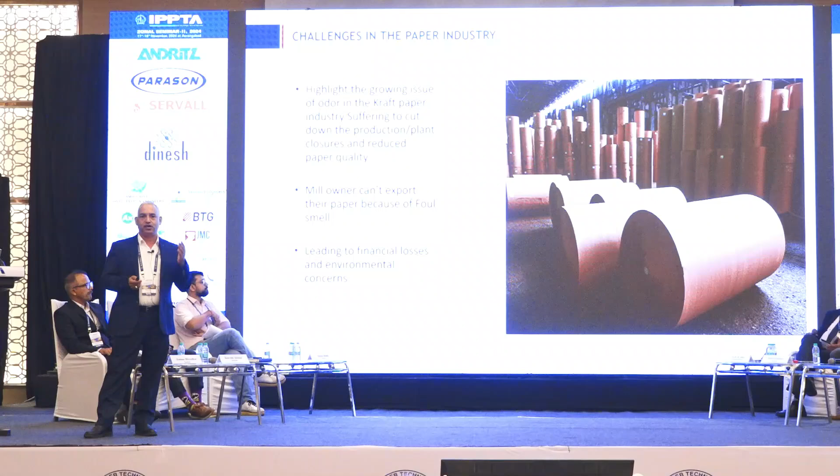As we all know, we are facing an acute problem of odor in all the Kraft industry. So many industries in Vapi have closed down, and many other industries have curtailed their production, not able to maintain the quality of our product and not able to compete in the international market. Odor is one of the issues. We are not able to maintain quality.

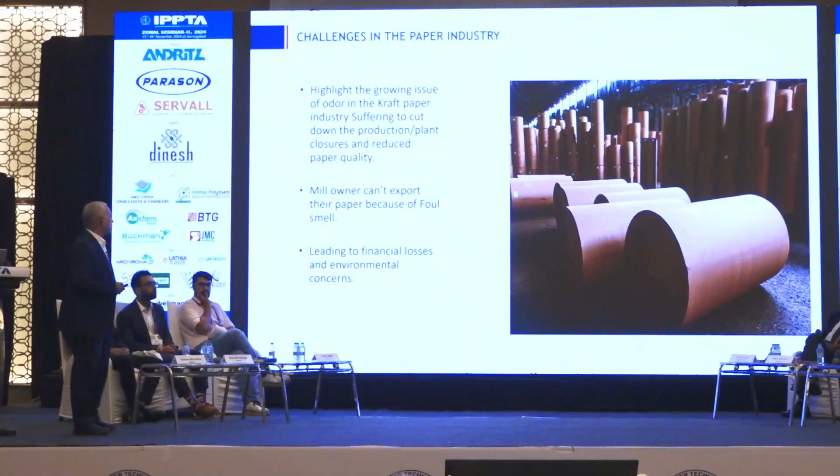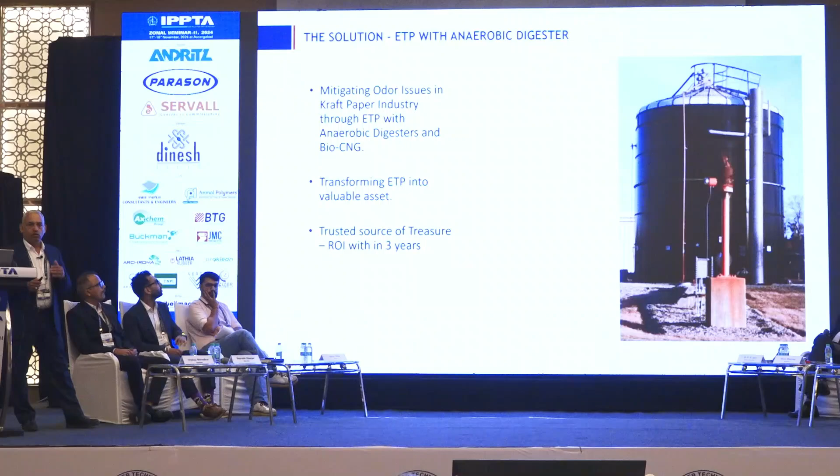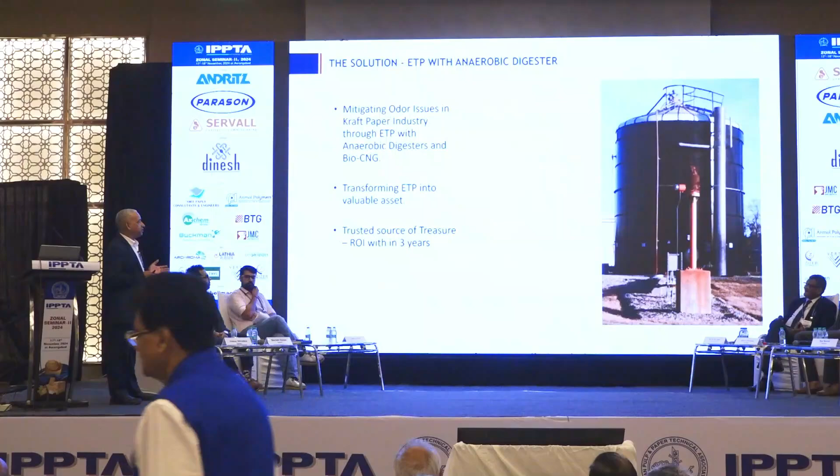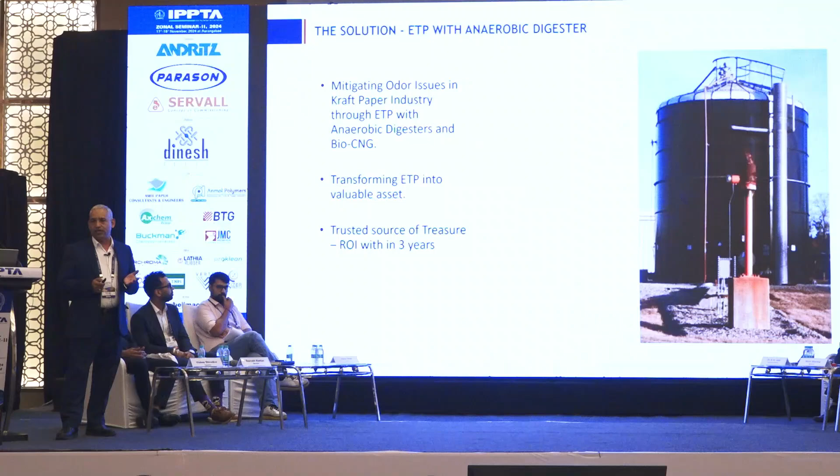We can use this anaerobic digestion system in our ETP to recycle the water with small purging to control the odor and COD in the total system. In the anaerobic digester, in the absence of oxygen, we transform the waste with the help of bacteria to bio-CNG. That is also a green energy which can be utilized in the power boiler, maybe power generation, and also CNG.

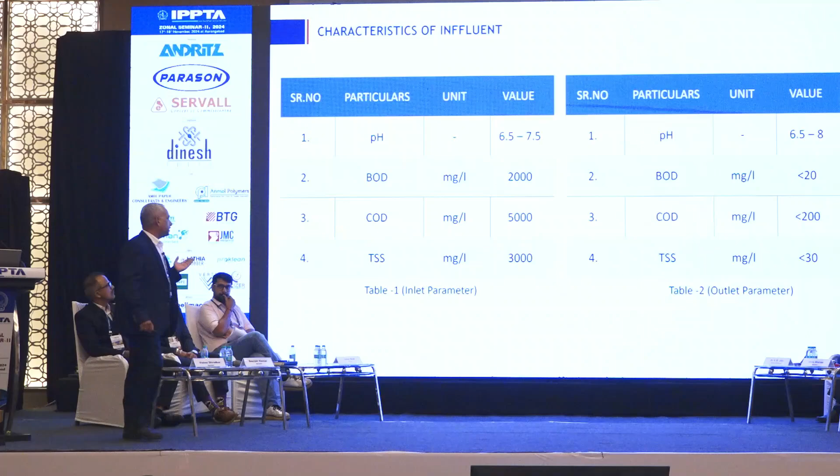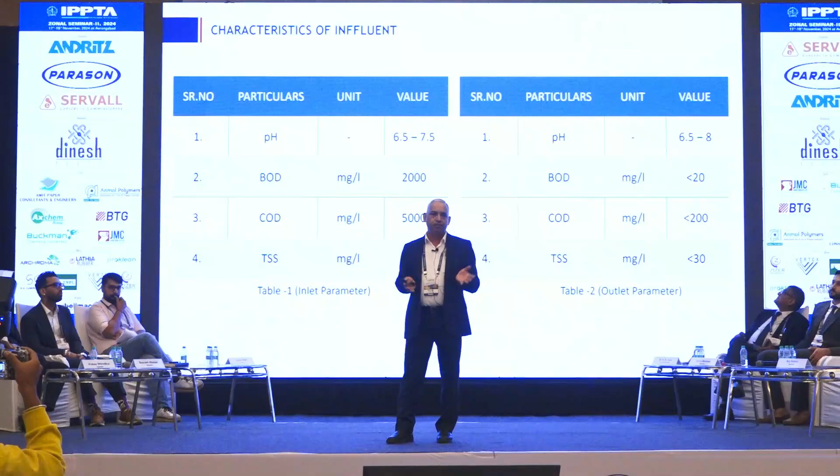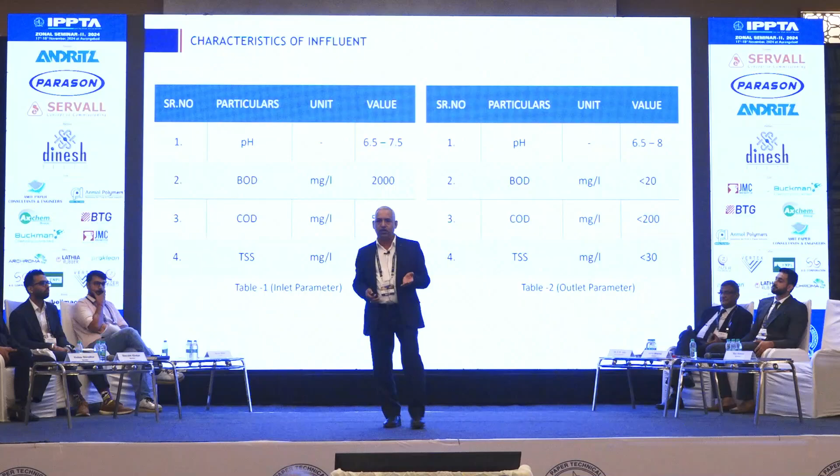These are the normal characteristics of the pH, BOD, COD, TSS in the input of the anaerobic digester. We have to maintain these parameters. Initially, when we start this system, the COD level may be 25,000, 30,000, maybe 50,000. But initially, for one time, we have to maintain it in the range of 5,000 to 7,000 ppm. Then it will be in the system, which will control the outlet parameter of COD as per the Central Pollution Control Board and State Pollution Control Board: BOD less than 20, COD less than 200, pH, and TSS less than 30.

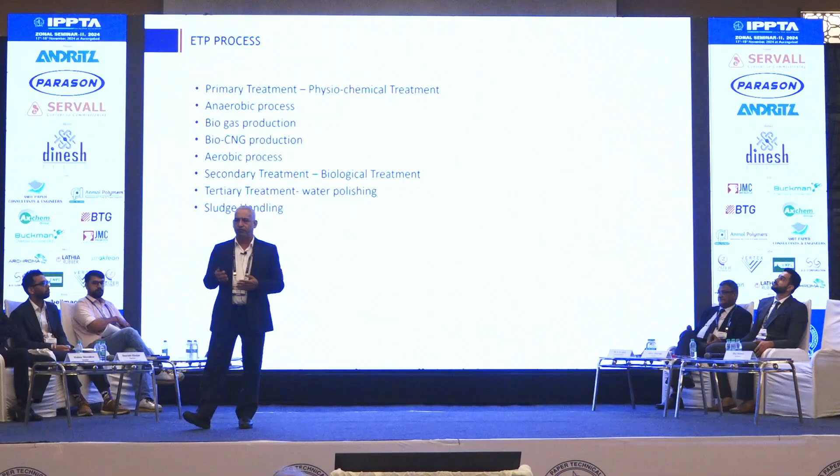In primary treatment, we maintain the TSS level only. In the primary clarifier, we remove the suspended particles like TSS, which is fiber and also non-fibrous material. Fiber we will reuse in the paper machine area, and inorganic material we will take out from the clarifier underflow and use as a fuel in the boiler.

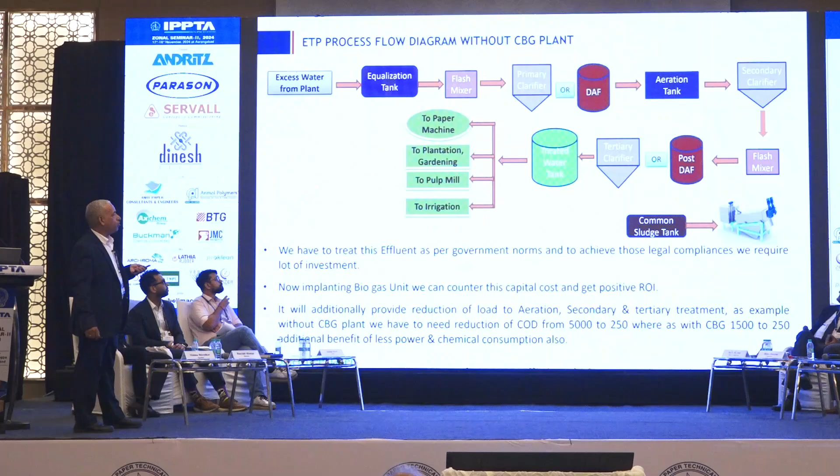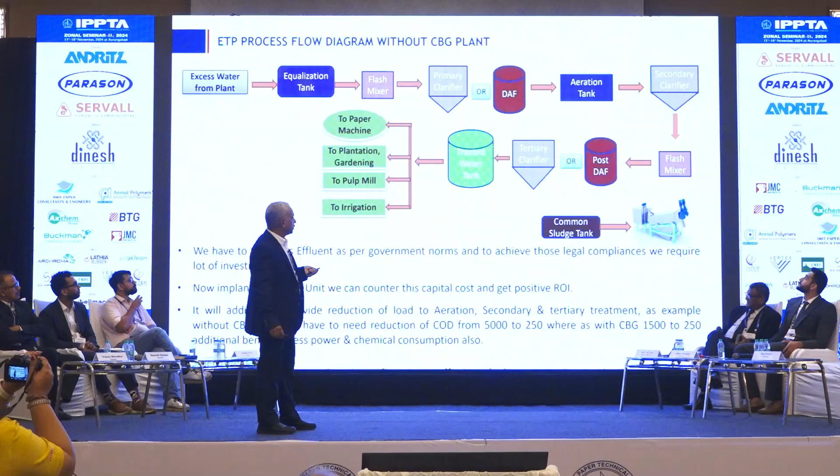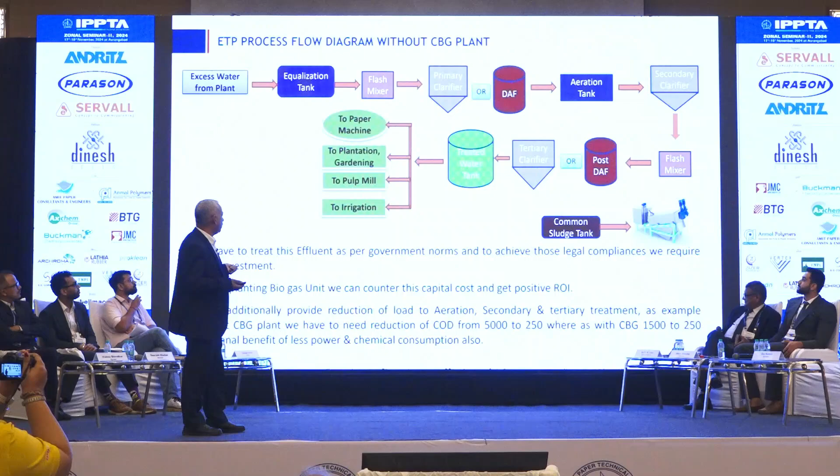This is the normal process flow diagram where we don't have an anaerobic digester. Either we have a primary clarifier or DAF in the ETP area where we remove the suspended solids. Then aeration to further treat it, reducing COD and BOD up to 90% with the help of oxygen. Then a secondary clarifier, then a tertiary clarifier to maintain the final treated water parameters as per the government norms. It may be used in the paper machine area, plantation, pulp mill and irrigation. With those parameters, we can utilize this in irrigation also.

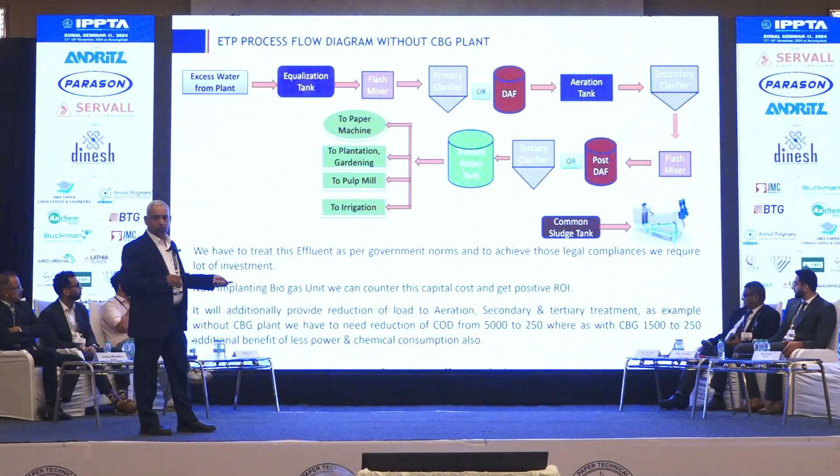If we don't have anaerobic digestion in the system, our treatment cost from 5,000 to maintain 250 is very high. But if we have an anaerobic system, 70% reduction will be there in the anaerobic digester. So my COD from 5,000 will come down to 1,500. So my aeration, secondary clarifier and tertiary treatment cost will come down 30% by this. And the area requirement will also be less.

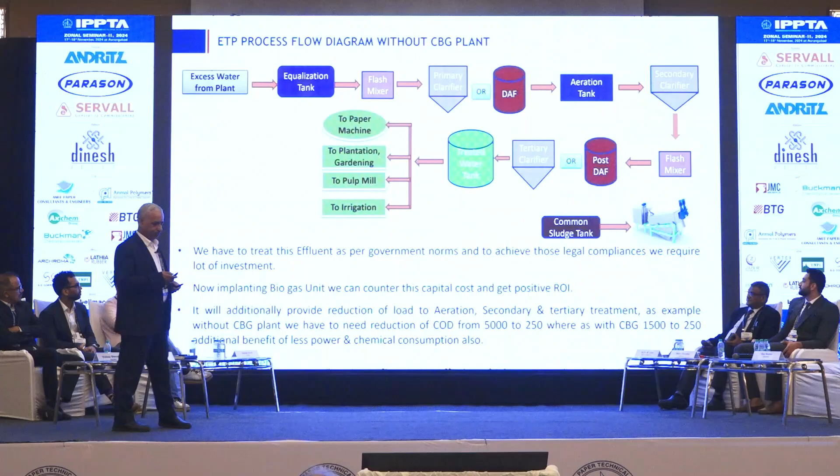Now, this was without the digester. This is with the digester and bio-CNG. After primary treatment, we remove the suspended solids. Water will go to the anaerobic digester. In the absence of oxygen, the bacteria will convert it into biogas, and that biogas contains methane up to 60 to 65%.

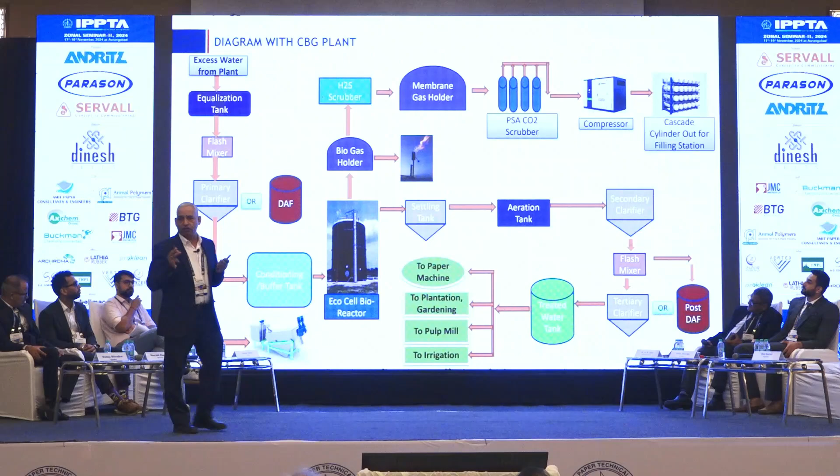But we have observed in 2 mills, one in South India and one in Haryana, we are getting methane up to 70-75% also, which is a very good value. And H2S content is around 2%, the rest is CO2. So first we have to remove the H2S in an H2S scrubber.

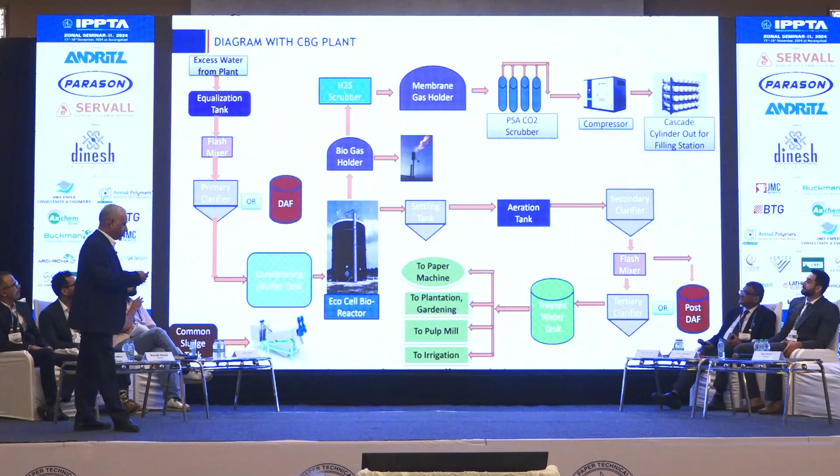There are some technologies in the market, you see here: H2S scrubber, wet scrubber, chemical scrubber, chelating agent. These are the technologies to remove the H2S, and the H2S will be converted into sulfur, which is also an organic fertilizer that can be used in the fields.

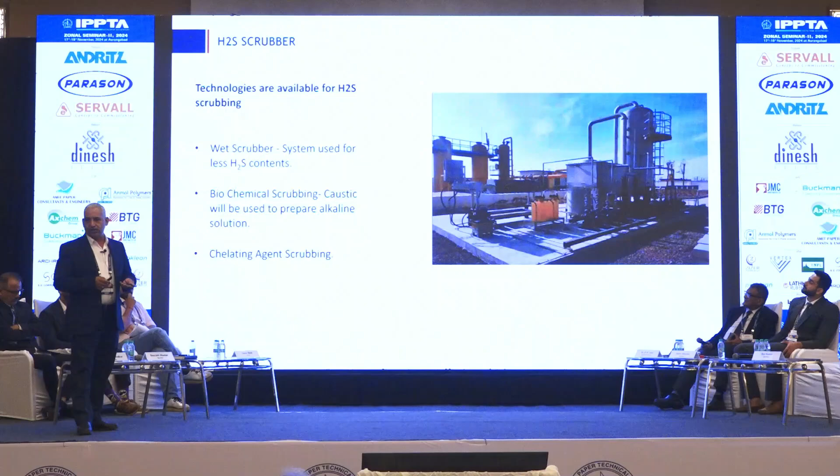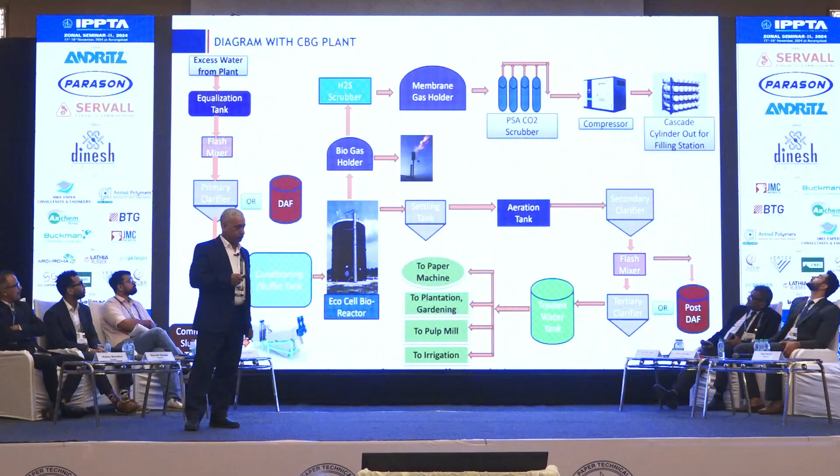Then there is a membrane balloon. After that, I will go through that. This is the input parameters of the reactor. This is the outlet. Methane percent more than 90%, CO2 less than 4, H2S is less than 10 ppm. And for bio-CNG, government has given up to 30 ppm, but we can maintain up to 10 ppm.

And use: either we can use it in the existing boiler as a fuel if we have shortage of steam, otherwise we can convert that into power also. Then power generation will be 2 to 2.2 units per meter cube raw biogas. If we further treat the raw biogas and remove the CO2, we can convert it to bio-CNG. That will be a fuel for vehicles, green energy.

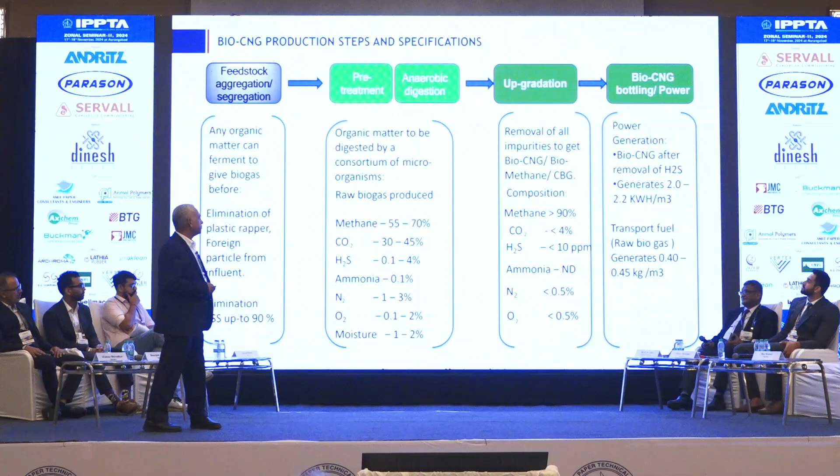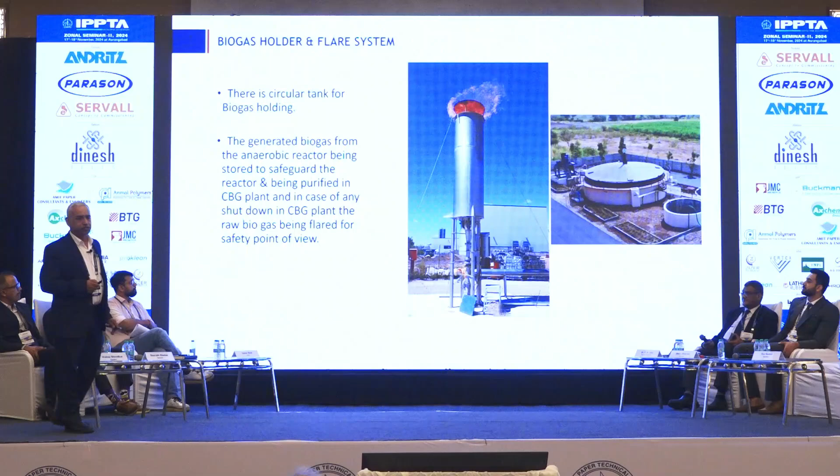This is an anaerobic digester. We have to have this system also, biogas holder in between and flaring system, because we cannot store the gas so long. So in case the system is shut due to some maintenance or other problem, we have to flare that gas for that time. And that will be auto ignition, a fully automatic system. H2S scrubber.

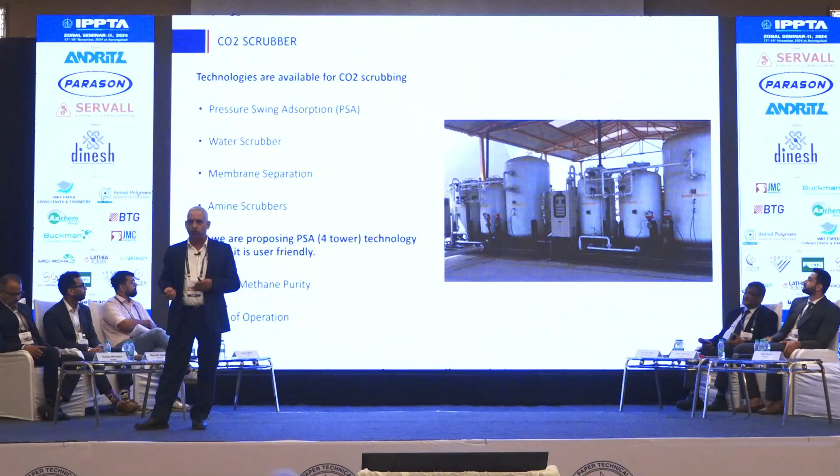Then next is we have to remove CO2. To remove the CO2, there are 4 technologies available in the market, but for Indian conditions, we prefer PSA, pressure swing adsorption technology, with the help of zeolite molecular sieves, which we also use in the oxygen plant to get oxygen from the air for either medical oxygen or any industry use. Same technology we use here to remove the CO2 from the methane gas, and pure methane will pass to the next process of compression.

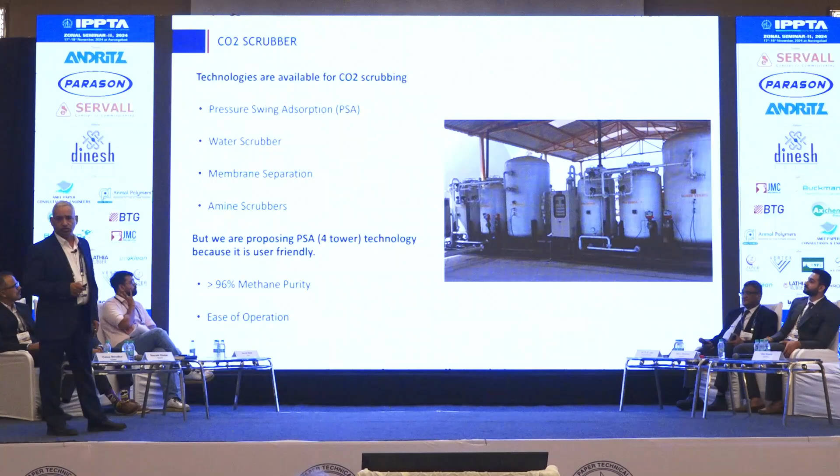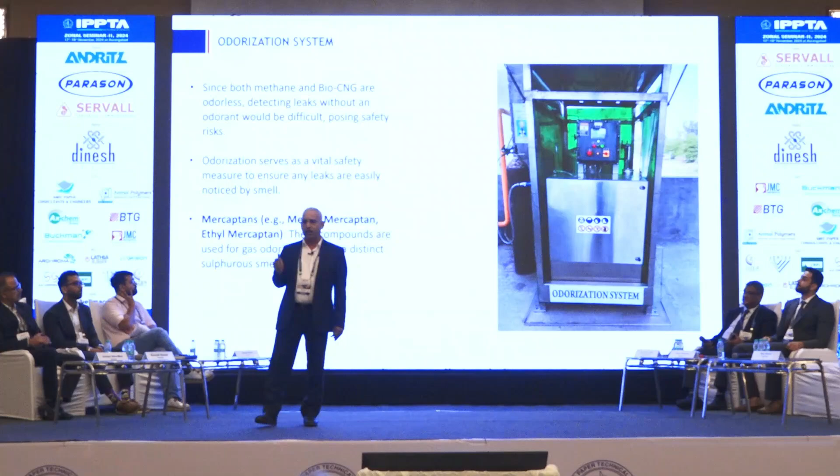This is the odorization system, just like LPG gas. There is no smell of methane gas, it is a natural gas. So we have to add some ppb level of mercaptans, so that in case there is any leakage, the operating crew comes to know that some leakage is there, to control that leakage.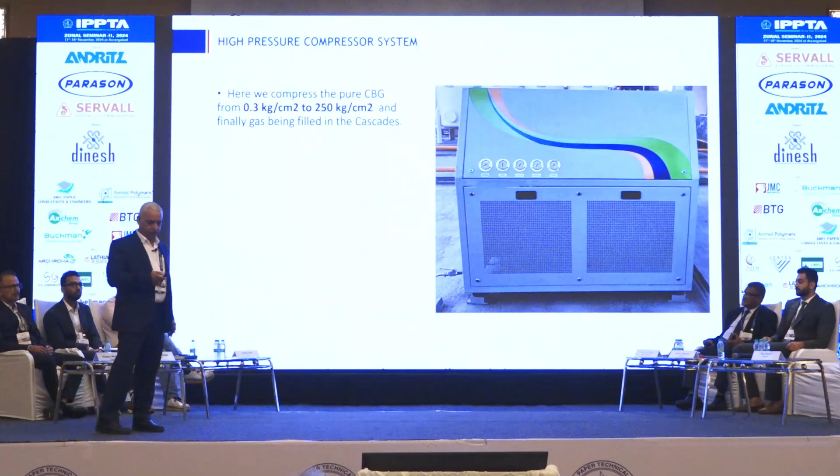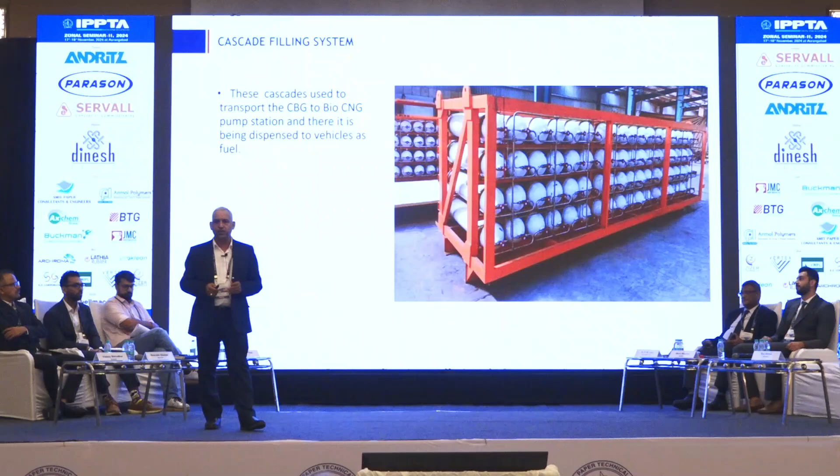Then finally the cascades. There are 2 forms of cascades, one is 40 cylinders and another 60 cylinders. In 40 cylinders we can contain up to 500 kg of pure methane gas, and in 60 cylinders we can contain up to 900 kg, for the transportation of the fuel to the petrol pump. Now see, this is the actual selling point of the bio-CNG at the pumps.

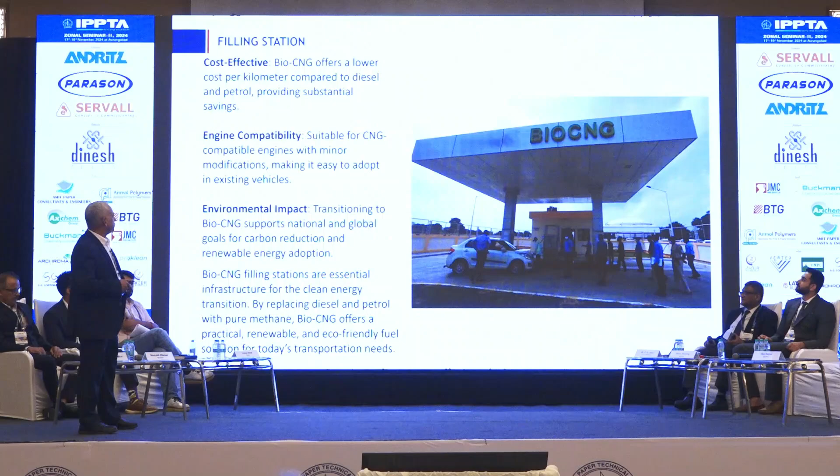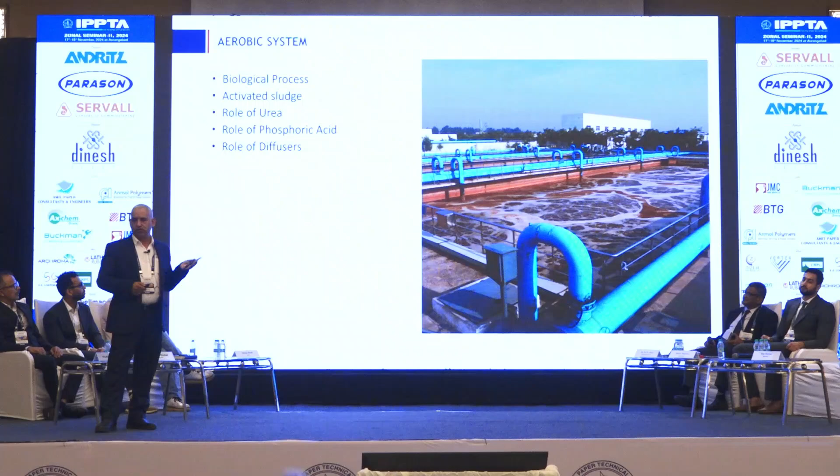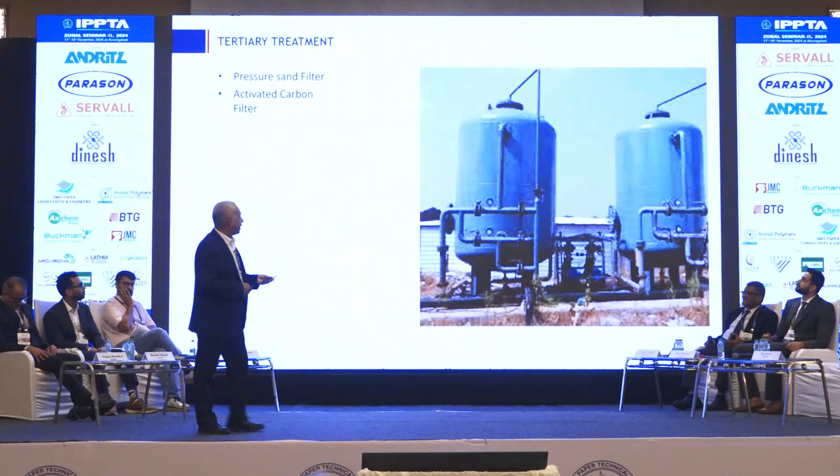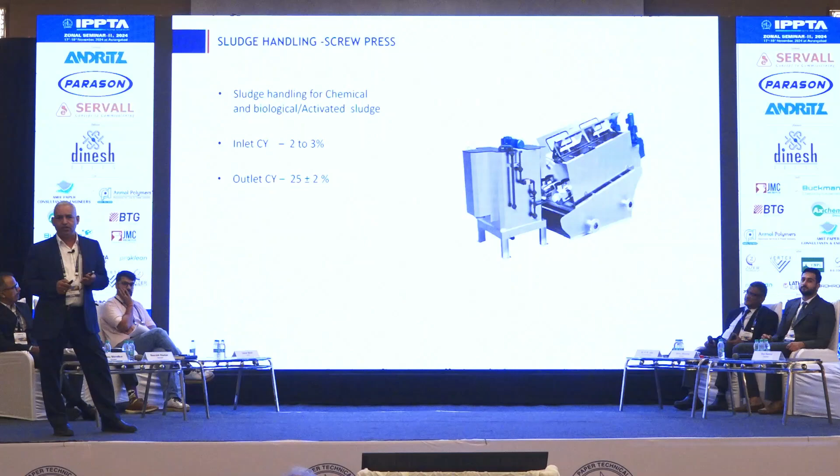Next, after the anaerobic digester, there is a normal process of aeration in the aeration tank with the help of oxygen. Then secondary treatment to remove the bacteria. Then polish filter and end use. The underflow which comes from the primary clarifier and secondary clarifier we treat with the screw press, and that sludge may be used in the boiler or sent to egg tray manufacturing companies.

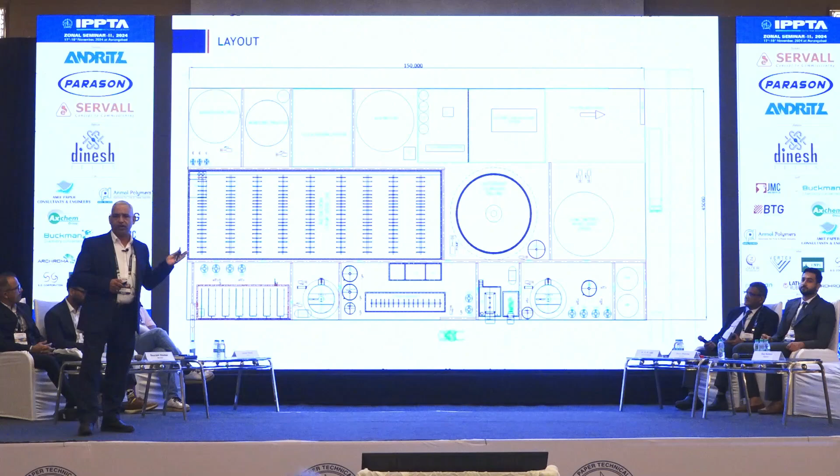This is the layout of the ETP plant with the bio-CNG. We need at least minimum 2 acre land for the complete plant. We do complete end-to-end engineering, not only equipment supply: total engineering, automation, pump sizing, equipment sizing.

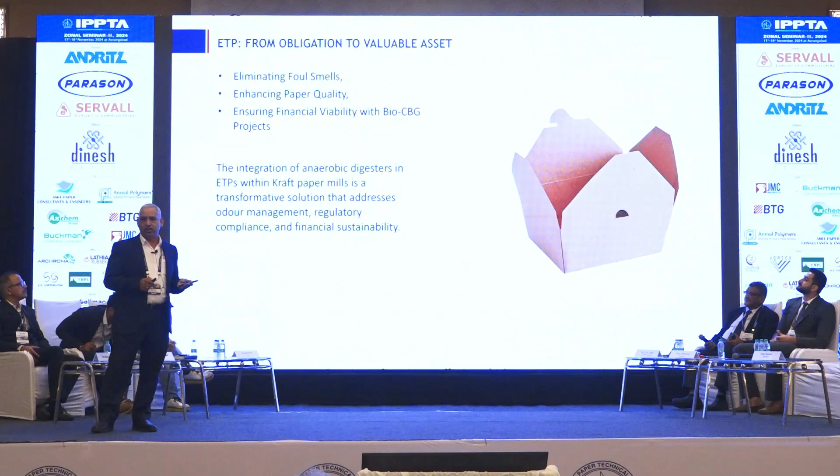And with all this, we can remove smell from our paper, and we can reuse the water with little purging of the system. Because calcium is there, we have to treat that calcium. Our R&D team is working on that. But with a little bit of purging of the treated water, we can achieve smell-free paper.